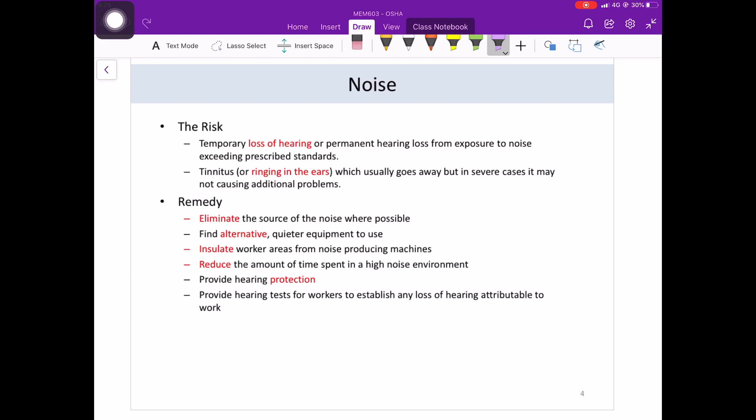The remedies are: eliminate the source of the noise whenever possible, find other alternatives such as quieter equipment to use, insulate workers' areas from noise produced by the machines, reduce the amount of time spent in a high noise environment, provide hearing protection, and provide hearing tests for workers to establish any loss of hearing attributable to the work.

As discussed, the fundamental hazard associated with excessive noise is hearing loss. A number of different factors affect the risk of hearing loss associated with exposure to excessive noise. The most important of these are intensity of noise related to sound pressure level, type of noise such as wideband, narrowband, or impulse, duration of daily exposure, total duration of exposure, the age of the individual, coexisting hearing disease, nature of the environment in which exposure occurs, distance of the individual from the source of the noise, and position of the ears relative to the sound waves.

From these various factors, the most critical are the sound or noise level, frequency, duration, and distribution of noise. As we know, exposure to sound levels below 80 decibels is generally considered safe. Meanwhile, the unprotected human ear is at risk when exposed to sound levels exceeding 115 decibels. Note that prolonged exposure to noise levels higher than 80 decibels should be minimized through the use of appropriate personal protective devices. To decrease the risk of hearing loss, exposure to noise should be limited to a maximum 8-hour time-weighted average of 85 decibels.

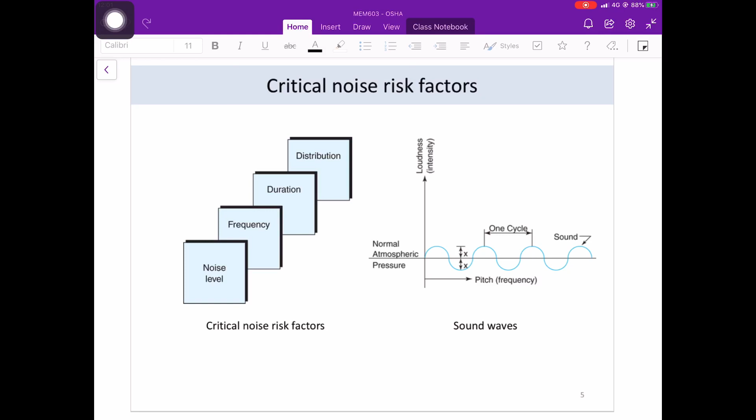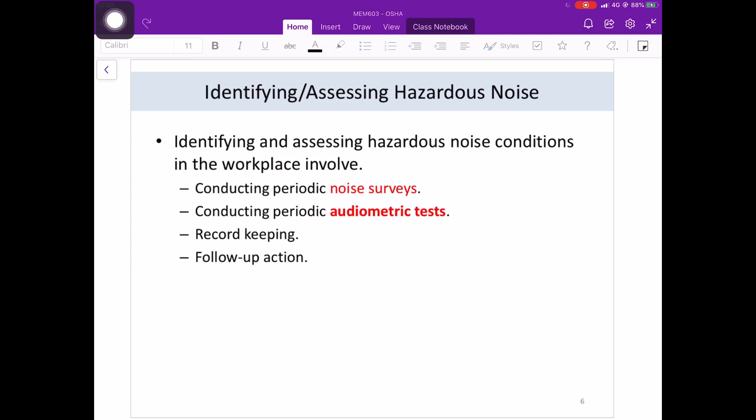Identifying and assessing hazardous noise conditions in the workplace may involve conducting periodic noise surveys, conducting periodic audiometric tests, record keeping and follow-up action. Audiometric tests. Audiometric evaluation is crucial to the success of the hearing loss prevention program in that it is the only way to determine whether occupational hearing loss is being prevented.

If the comparison of audiograms shows temporary threshold shift, such as a temporary hearing loss after noise exposure, early permanent threshold shift, or progressive occupational hearing loss, then it is time to take swift action to halt the loss before additional deterioration occurs. Because occupational hearing loss occurs gradually and is not accompanied by pain, the affected employee may not notice the change until a large threshold shift has accumulated. However, the results of audiometric tests can trigger changes in the hearing loss prevention program more promptly, initiating protective measures and motivating employees to prevent further hearing loss.

Audiograms are recommended on the following occasions for maximum protection of employees: pre-employment or prior to initial assignment in a hearing hazardous work area, annually as long as the employee is assigned to a noisy job environment with a time-weighted average exposure level equal to or greater than 85 decibels, at the time of reassignment out of a hearing hazardous job, and at the termination of employment.

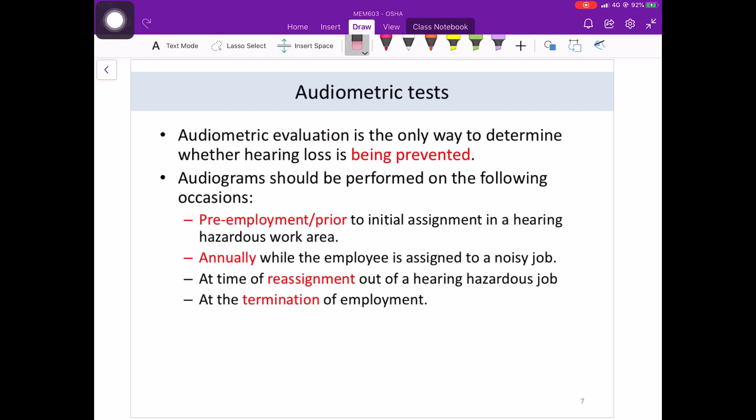In addition, it is suggested that employees who are not exposed be given periodic audiograms as part of the organization's healthcare program. The audiograms of these employees can be compared to those of the exposed employees whenever the overall effectiveness of the hearing loss prevention program is evaluated. In an optimally effective program, the two employee groups should show essentially the same amount of audiometric change.

There are three components of a noise hazard: noise source, noise path, and noise receiver. Noise sources can come from unbalanced rotating equipment, mechanical shock between solids, friction between metal parts, and vibration of large plates.

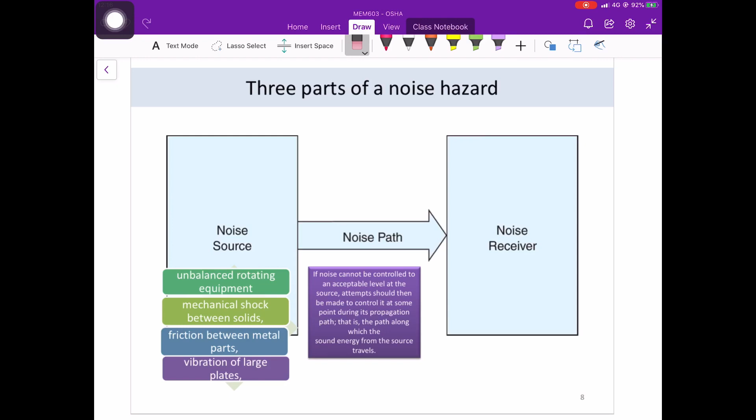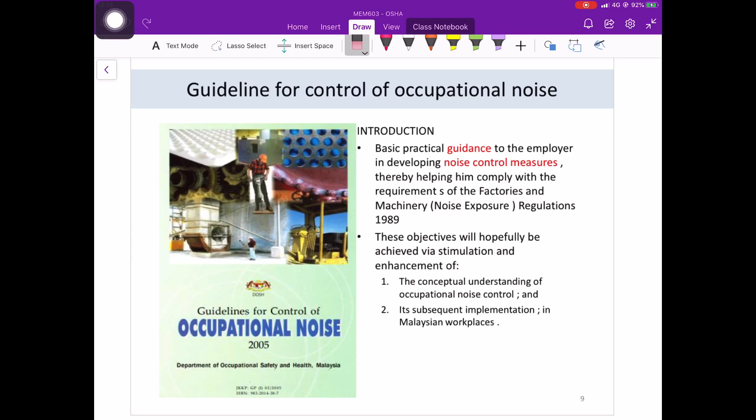Guidelines for control of occupational noise have been developed by the Department of Occupational Safety and Health Malaysia that provide basic practical guidance to the employer in developing noise control measures to comply with the requirement of the Factories and Machinery Noise Exposure Regulations 1989. These objectives can be achieved via stimulation and enhancement of the conceptual understanding of occupational noise control and its subsequent implementation, specifically in Malaysian workplaces.

Noise can be reduced by engineering and administrative controls. The most desirable noise controls are to reduce the noise at the source. The second priority is to reduce the noise along its path, and the last resort is noise reduction at the receiver using personal protective devices. Again, the use of PPE should never be substituted for the two former approaches.

Note that the noise made from most of the equipment is mainly due to waste energy. Generally, reducing the noise at the source offers the most options, such as enclosing the source, altering the acoustical design at the source, substituting the equipment with less noisy equipment, or even changing the process so that less noisy equipment can be used.

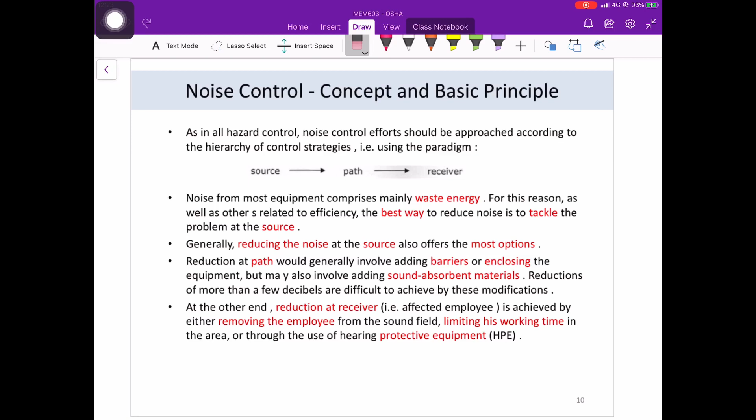Reduction of noise at the path would generally involve adding sound-absorbent material or moving the source farther away from the receivers. Reduction at the receiver may be achieved by removing the employee from the sound field, enclosing the worker, limiting the worker's working period in the work schedule so that the time of exposure is reduced, or through the use of hearing protective equipment (HPE).

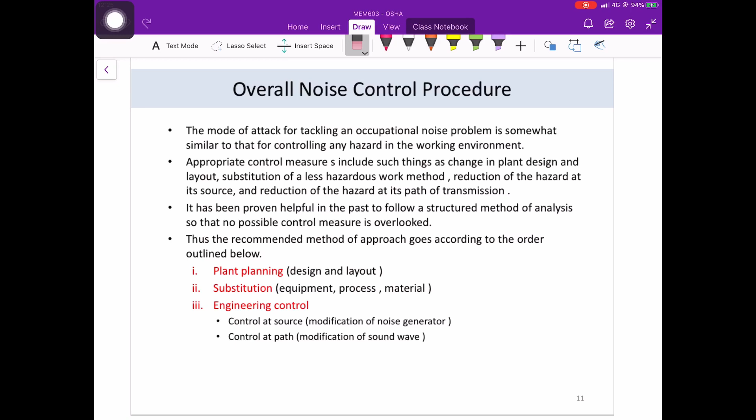The mode of attack to tackle occupational noise hazards is similar to the method for controlling any hazard in the working environment. The use of any appropriate control measures, including change in the plant design and layout, substitution to less hazardous work methods, reduction of the hazard at its source and its path of transmission. It has been proven helpful to follow a structured method of analysis so that no possible control measure is overlooked. Thus, the recommended approach is according to this outline: plant planning, substitution, and engineering control.

Control by plant planning. It is important to consider the following: the building's load-bearing structure, floors, and machine foundation should be chosen so that all noise sources can be effectively vibration isolated. Powerful noise sources should be enclosed by structures which give adequate airborne sound insulation. Building elements where there is a risk of sound leakage require special attention.

Rooms where there are sound sources and where personnel are present continuously should be provided with ceiling cladding which absorbs the incident sound. Office areas should be separated from building elements where vibrating equipment is installed by a joint of elastic material. Walls and ceiling constructions, windows, doors should be chosen so as to achieve the required sound isolation. Mounting the noisy equipment on light or movable partitions should always be avoided. In open plan offices and large rooms where several office functions are carried out in the same room, there must be a ceiling with high sound absorption, and soft carpeting on the floor is also beneficial.

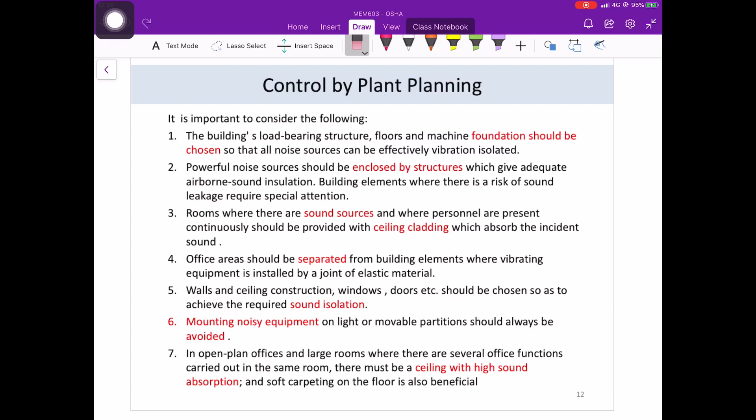Control by substitution. Use quieter equipment. Some examples are given as follows: replace high-frequency propeller or axial flow fans with squirrel cage type blowers, which emit noise of lower frequency. Replace high-speed fans or blowers with low-speed types. Replace gear increasers with turbine drives, which are usually less noisy where high speeds are concerned. Replace air ejectors for removing parts from punch presses with a mechanical ejector.

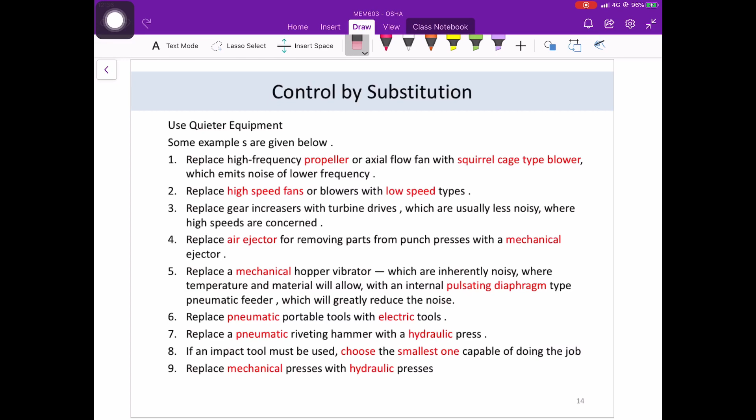Replace a mechanical hopper vibrator with an internal pulsating diaphragm type pneumatic feeder, which will greatly reduce the noise. Replace pneumatic portable tools with electric tools. Replace a pneumatic riveting hammer with a hydraulic press. If an impact tool must be used, choose the smallest one capable of doing the job, and replace mechanical presses with hydraulic presses.

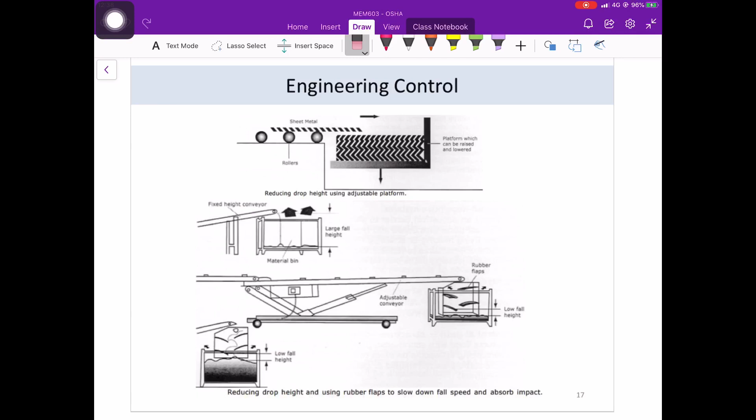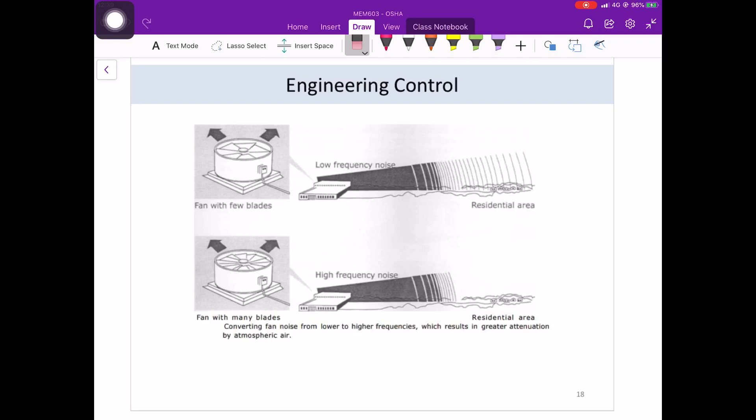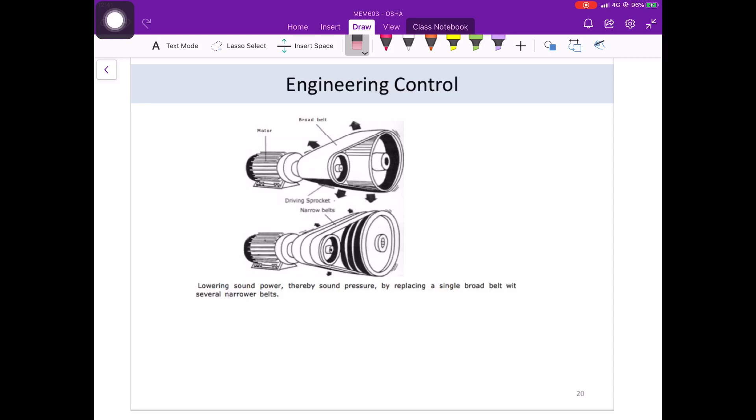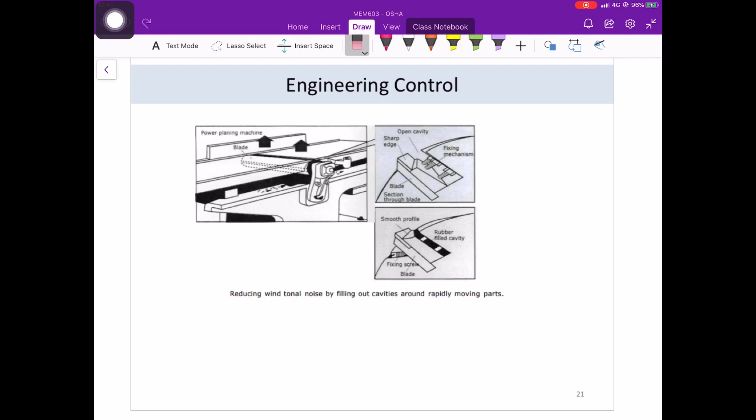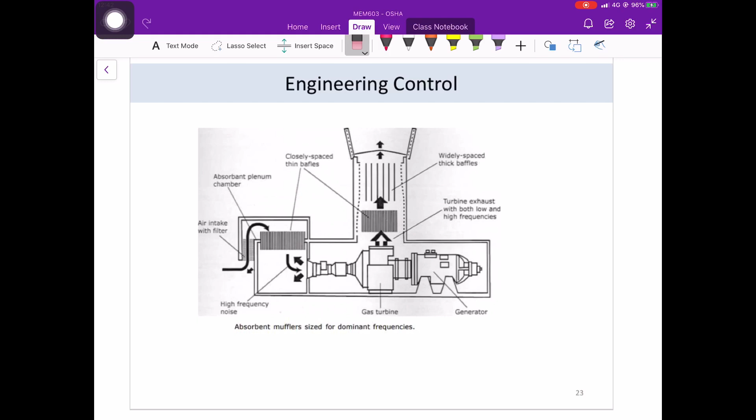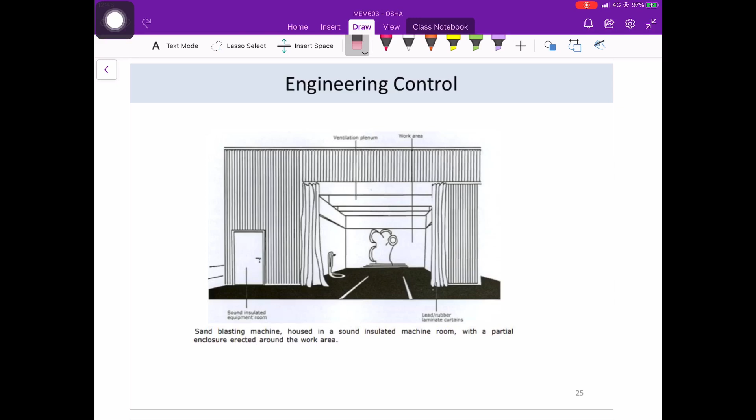Reducing wind tonal noise by filling out cavities around rapidly moving parts. Reducing fluid turbulence by straightening flow pathways. Use absorbent mufflers sized for dominant frequencies. Isolating vibration by placing heavy vibrating equipment on an inertial block with vibration isolators and dampers. And house the sand blasting machine in a sound insulated machine room with a partial enclosure erected around the work area.

Vibration hazards. Vibration hazards are closely associated with noise hazards because the tools that produce vibration typically produce excessive levels of noise. Some of the risks associated with vibration hazards are hand-arm vibration syndrome, which is a form of Raynaud syndrome that normally affects workers who use vibrating power tools as part of their daily jobs. Lower back pain is another reported disorder due to exposure to vibration. And with long exposure to vibration, workers are at risk to the lumbar spine and pain to the neck and shoulder.

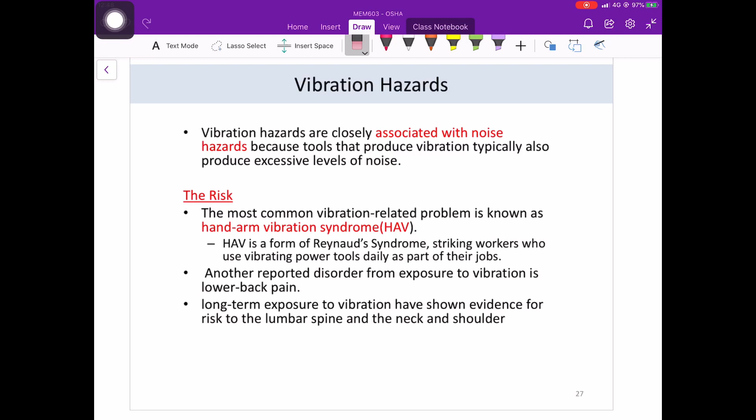Some methods to resolve these hazards are modifying the process, redesigning the task or the equipment, buying machines or vehicles that are designed to reduce the vibration transmitted to the operator, improving and maintaining road surfaces, implementing a seat maintenance program to ensure vibration dampened seats are maintained in good condition, implementing speed limits, implementing regular work breaks, posture changes, or job rotation to reduce exposure time, and providing training, information and supervision on adjusting and operating equipment, including seats, to reduce exposure.

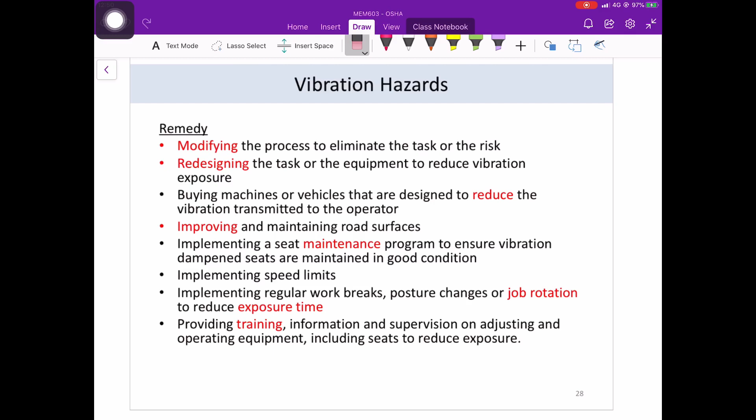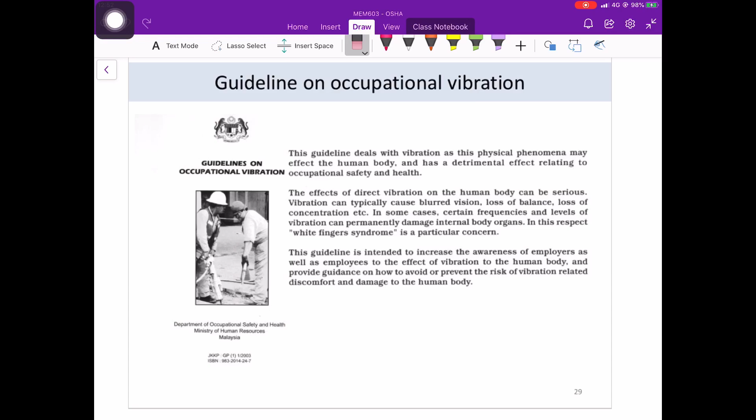The Department of Occupational Safety and Health Malaysia has issued guidelines on occupational vibration to increase the awareness of employers and employees about the effect of vibration on the human body and provide guidance to avoid and prevent the risk of vibration. According to these guidelines, vibration can be defined as an oscillatory motion of a mechanical system or body. The magnitude of vibration can be described by the displacement of this motion above some reference point, or alternatively by the rate of change of this displacement with reference to time.